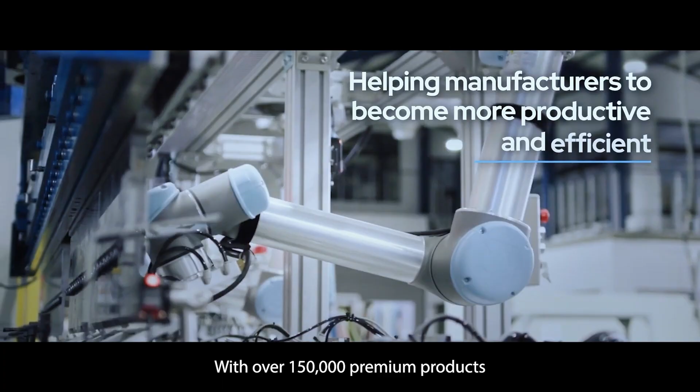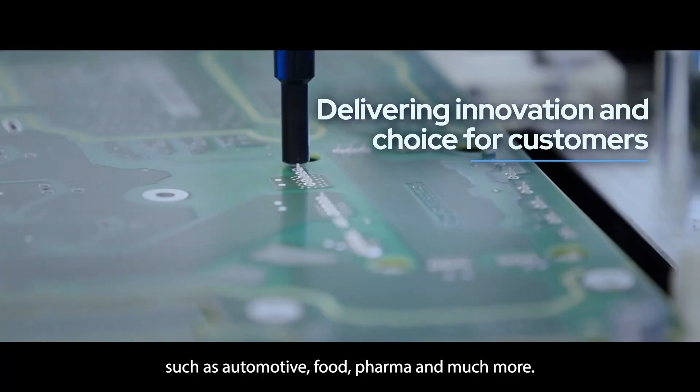Hello, I'm Yoav Katznelson, the CEO of TechCon Group. Hi, I'm András Kövesi, Head of Robotics in TechCon Group. With over 30 years of experience, TechCon has become one of the significant suppliers in the industrial automation market. With over 150,000 premium products and a team of over 150 specialist engineers, we support thousands of customers in different types of industries such as automotive, food, pharma, and much more.

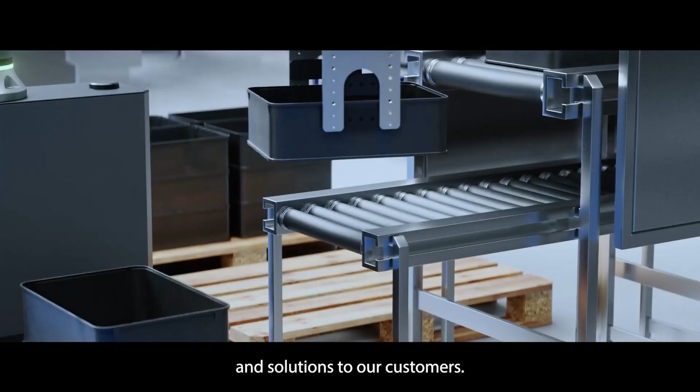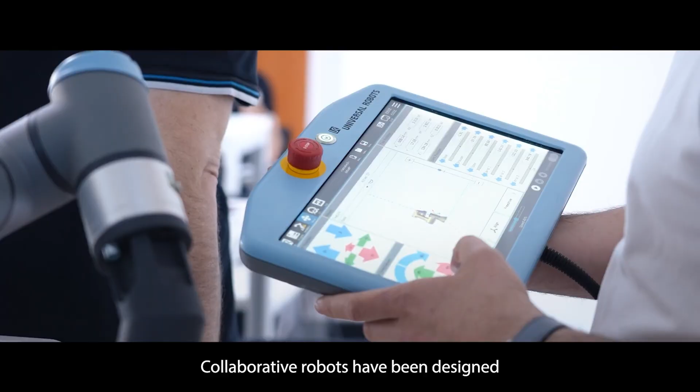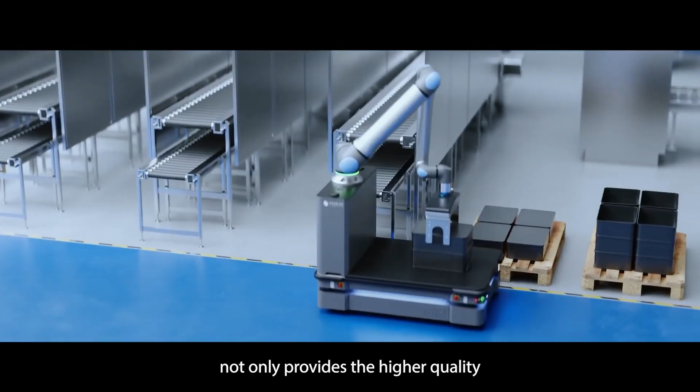It is in our DNA to continuously track the trends of the industry and deliver innovative production solutions to our customers. Industrial robots have been creating significant added value in the industry in the last decades, and in recent years we've seen the same trends with collaborative robotics. Collaborative robots have been designed and manufactured to work alongside human operators by taking over repetitive and ergonomically challenging tasks. Collaborative robots not only provide higher quality and increased productivity, but also increase the quality of the working environment at our customers' sites. In recent years, we have become one of the most significant distributors of Universal Robots in the Central and East Europe market.

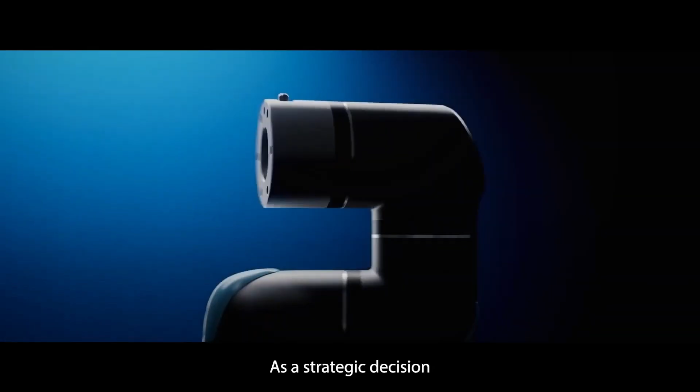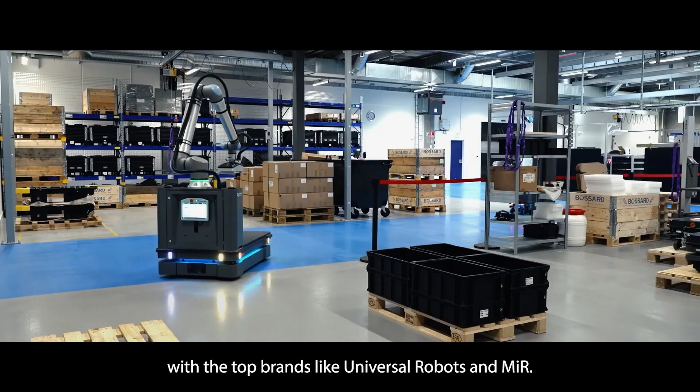As a strategic decision, it is an engine for growth for us, and mostly to support our customers, we decided to collaborate with top brands like Universal Robot and MiR. Our team possesses superior technical knowledge and experience in delivering collaborative robots and applications to the industry.

Our companies are equipped with cutting-edge technology workshops and high-level laboratories to design, manufacture and deploy the best collaborative applications to our customers. Our application engineers are trained and dedicated to find the right solution for any collaborative application demands from any kind of industry. But we don't stop at robots. Whether you are an end user or an integrator, we deliver a full package of automation for you. We encourage you to put your trust in TechCon, and we will help you realize your potential in collaborative robotics.

I would like to summarize the topics I will speak about here right now. I'm not going to go into a very technical discussion about AI usage in robotics. I leave this field for my colleague Wojciech, who is much more experienced in this. I would like to give some insights and key factors for industrial decision makers about investing in cobotics, like an executive briefing. I will also share some use cases, and this one will lead you into the AI field. You will see it at the end. This is all for me, and now I will start. Thank you.

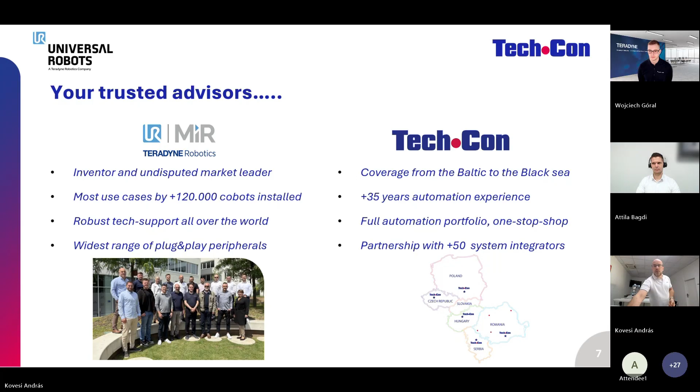Why is it not okay? It's changing now. I don't want to introduce you to collaborative robots because they exist since 2008 and they are widely known in the industry. But still, during our experience with our partners and customers, we face a lot of white spots and misunderstanding about collaborative robots. The first thing which is reflected to us very often is how come the cobots are not cheaper than industrial robots, because they are smaller and slower, so they appear like a small cheap industrial robot. But this is not the case.

Cobots are also industrial robots, but built with a lot more complex internal structure to enable collaborativity to work alongside human beings. As you see, a collaborative robot has a light alloy aluminum body. It has got torque controlled harmonic drives in the joints. It has embedded safety and control drivers in the software of the cobot. It has a lot of plug-and-play peripheral drivers also embedded in the cobot driver. All these are not default characteristics of a traditional industrial robot. Therefore, these functions have a certain consequence on the cost of collaborative robots, and this creates the fact that the collaborative robot's price is similar to an industrial robot's price. By the way, both are around the price of a medium-sized family car, like you see on the picture.

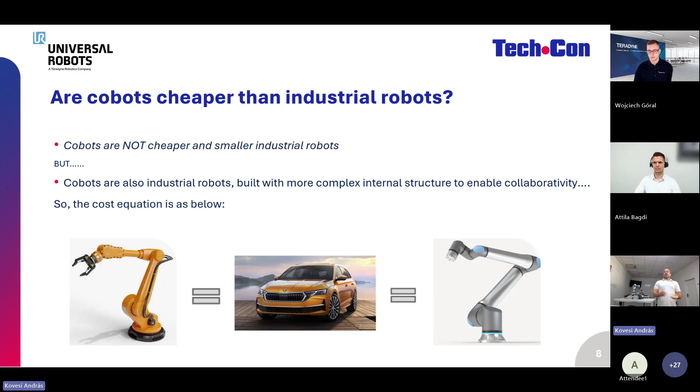So then comes the question: if they are not cheaper, then why apply collaborative robots? If we stay at the purely financial point of view, you have to know that the total cost of ownership of a full robotic cell is much lower than a traditional industrial robotic cell. Approximately, the difference is 40% in advance of the collaborative robotic cells in cost because of several factors.

First, the less complex construction and structure. The already existing and built-in control, safety, and driver functions in the software of the robot. The very easy and quick installation of plug-and-play peripherals. The lower, approximately 40% lower space requirement due to the more compact construction, and also due to the less safety space requirement. And at last but not least, the installation due to all this is approximately 2 times faster than the robotic cell. So all this provides a high cost advantage to the collaborative robotic cells.

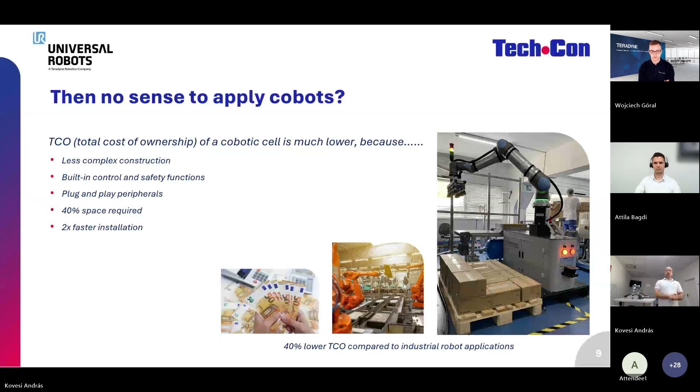Then, is it only about the investment cost? Of course not. When a production plant is intending to invest into automation, there are a lot of other factors to be considered. I highly recommend to you and your teams to put these 5 questions for yourself and examine them carefully before deciding which kind of robot to install on your shop floor.

The first one: what is the mix of your production? If you have a lot of frequent changeovers with high mix, medium to low volumes, then it calls for collaborative robotics, because the changeover times due to the flexibility and the plug-and-play functions are much faster. You can even change the location of the cobot much easier than an industrial robotic cell. Of course, if you have high volumes, low mix, then it calls for industrial robots. Also very important to know if you have in-house robot programming skills or not, because industrial robots require high-level in-house programming skills to run smoothly, while collaborative robots are a lot more autonomous and basic programming skills can be learned much faster. The second one is, of course, the throughput, what the target per minute is.

Speed is the primary bottleneck. Collaborative robots are usually useful during a retrofit automation of a production line, where you replace an existing human-operated workstation with an automated one. On speed and throughput, these cobots can work safely, but if you need lower cycle times, below 5-6 seconds per cycle, you must go for industrial robots.

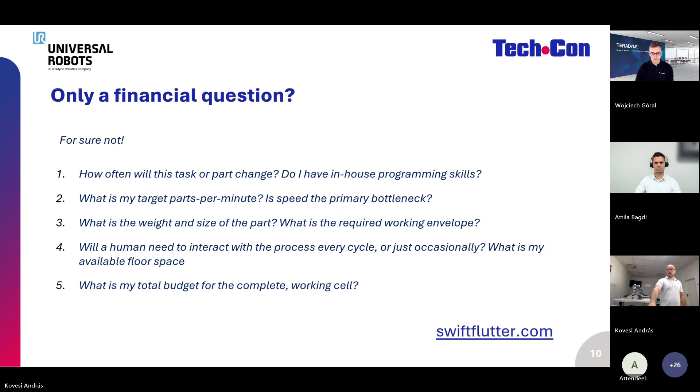And last but not least, the budget for the complete working cell - we've already discussed this on the previous slide, so I don't want to repeat it.

Let's say in this aspect you have decided to invest into collaborative robotics and build cobotic applications. Here are a few rules of thumb to help you find the right task for a collaborative robotic application. The first one, quite understandable: collaborative robots can perform more or less the same simple tasks done by human operators.

By speed and weight, they are more or less on the same ability as a human operator. They're a bit faster, because the tool center point speed of a cobot can be up to 4 meters per second, and they can lift even 30-35 kilos. And of course, they don't get tired - they work 24/7, 365 days a year. As a general approach, what can be done by a human operator, a cobot can do.

The next point is very important: always look for the 3D test. 3D here isn't the dimension - it's a synonym for dumb, dirty, and dangerous tasks carried out by human operators. If you relieve your skilled workforce from unhealthy, unergonomic, boring tasks, you can use their high skills for more complex tasks, improving your production efficiency.

The third point is also very important. We face quite often the request to automate the most complex and difficult non-automated bottleneck of the production, and this is tricky - usually there's a reason why a certain task isn't automated. So I always advise automation teams and decision makers to go for low-hanging fruits first, automate tasks that can be easily automated, and then dedicate the skilled labor you liberate from those functions to work on the bottleneck, non-automated stations of the production, which will help you overcome that bottleneck.

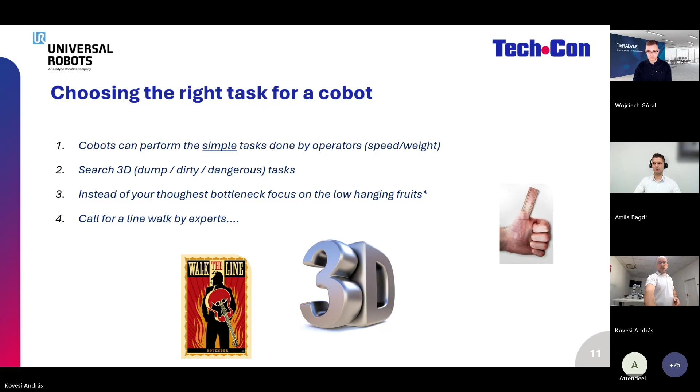And at the end, I'd like to show some non-typical use cases, all from our reference list, performed by us and our integrator partners, which can give you some nice aspects of possible collaborative automation options from a non-standard point of view. The first one - I'll start the video now.

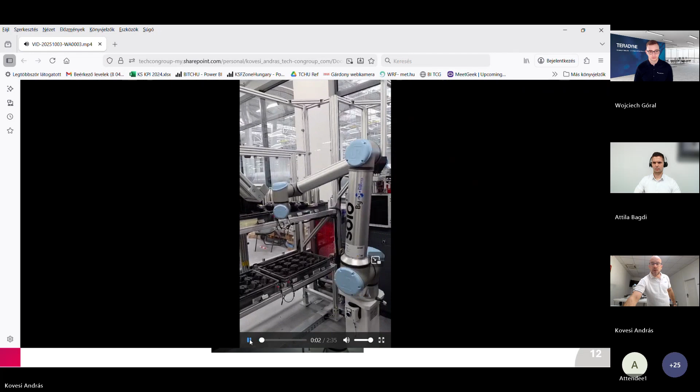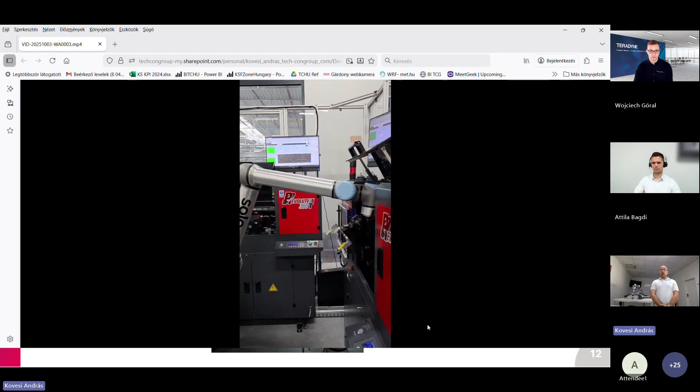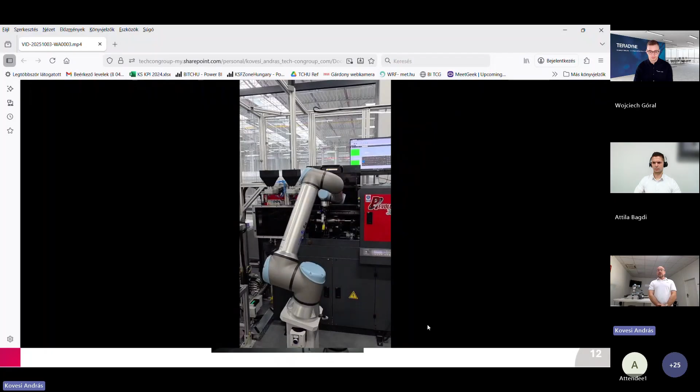Okay, so the first one is a machine tending task. What is especially machine tending? Not specifically the machine tending, but as you see, the workpiece and also the machines, these workpieces are bottles, and they are being tampo printed. This application is at a company producing gifts and promotion materials for enterprises. This collaborative robot is tending CNC-driven tampo printing machines.

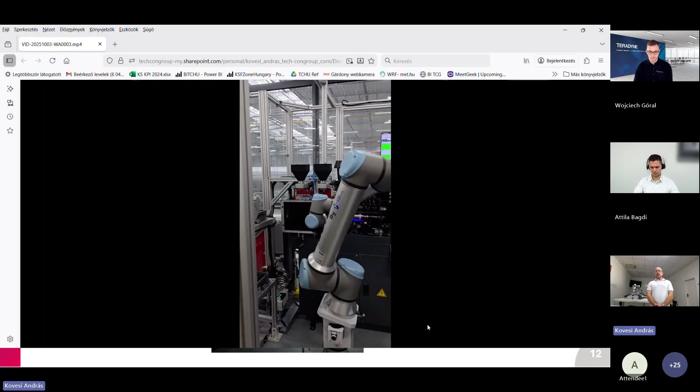This is a special success case for us because by implementing the robot, the throughput has increased by 40% in the production line. After installing the first cobot last autumn, another 3 is just being installed right now, and the next 3 is going to be released in the beginning of Q2.

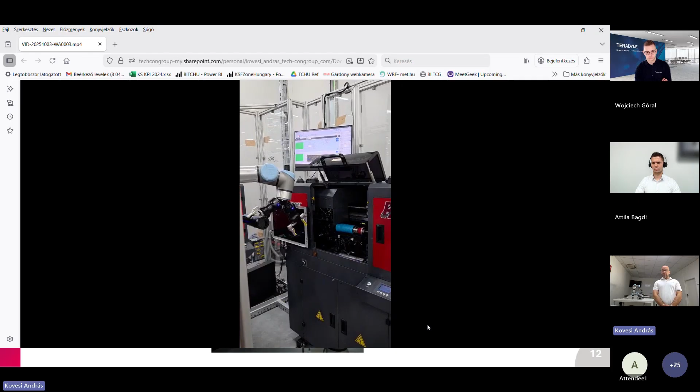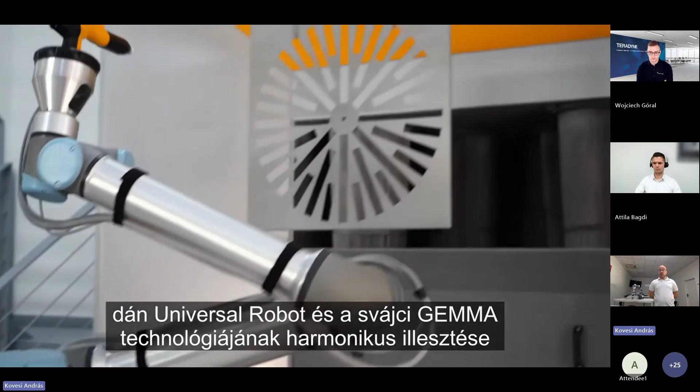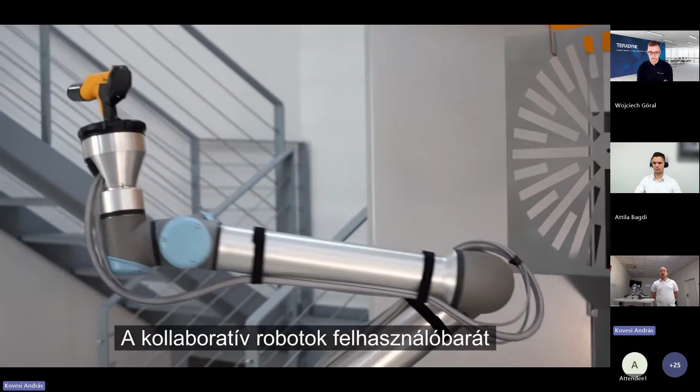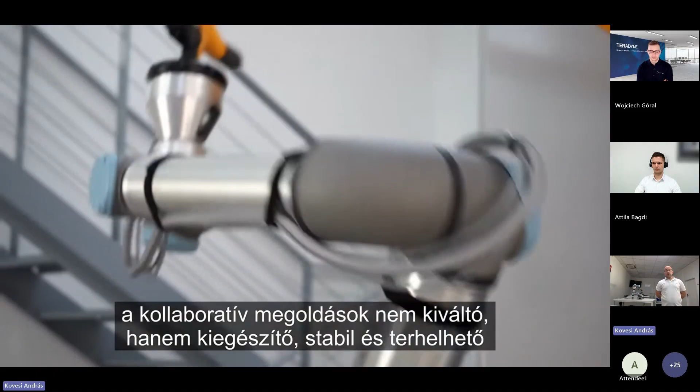The second application is a powder coating application. Yet again, automatic or robotic powder coating lines have existed for decades now. What is special here is that together with Gema, the powder coating systems producer, we have developed a collaborative robotic station to do the job on the manual stations. That means this application is specially designed for high mix, low to medium batches from 100 to 5,000 pieces in one go.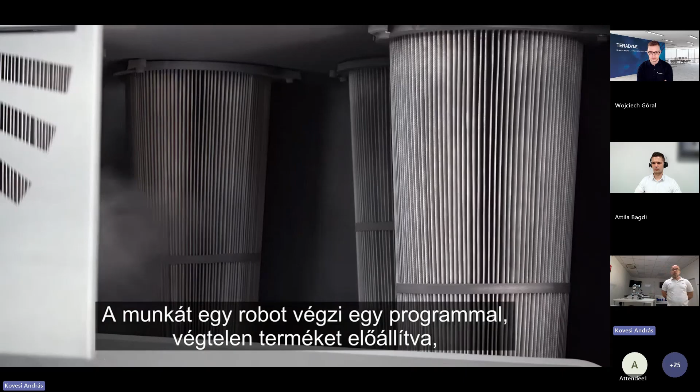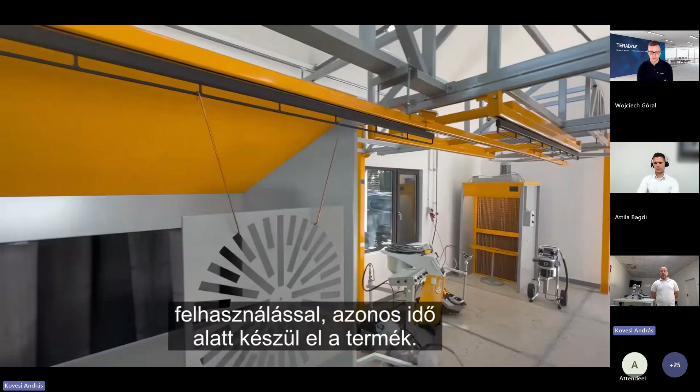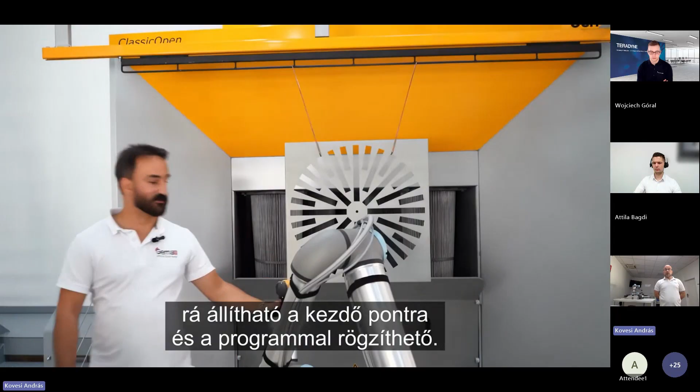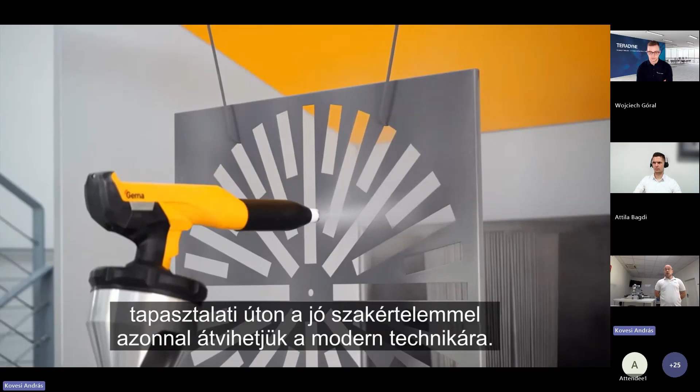With the very easy programming of the collaborative robot and the plug and play Gema powder coating pistol, the reprogramming of the cobot for a new workpiece to be painted takes between 10 to 30 minutes. So it enables an enormously quick changeover time. And yet again, powder coating is an unhealthy, unergonomic task, which is difficult to find good human operators to do. This gives a very good solution to relieve them from these unhealthy and boring tasks.

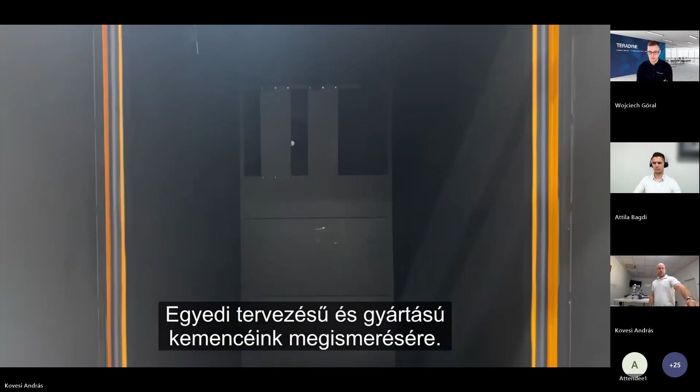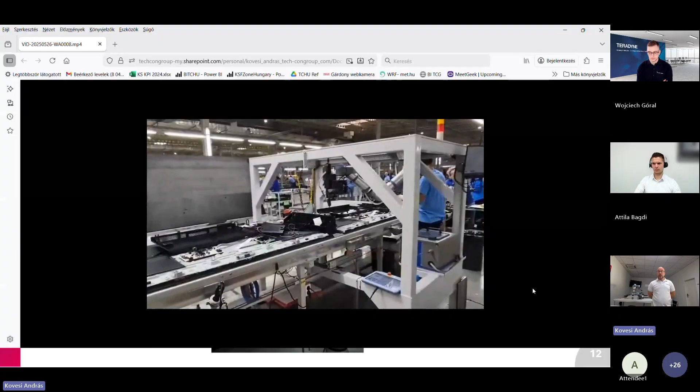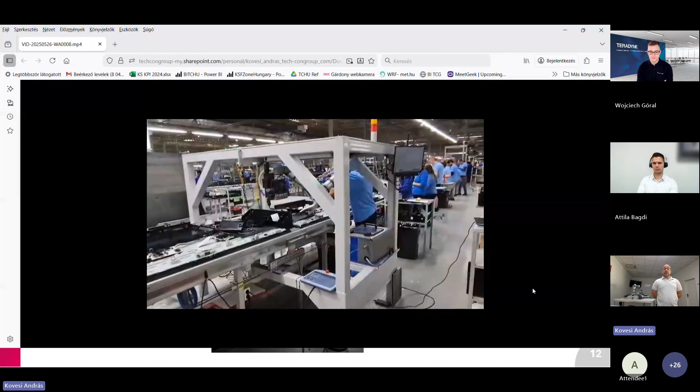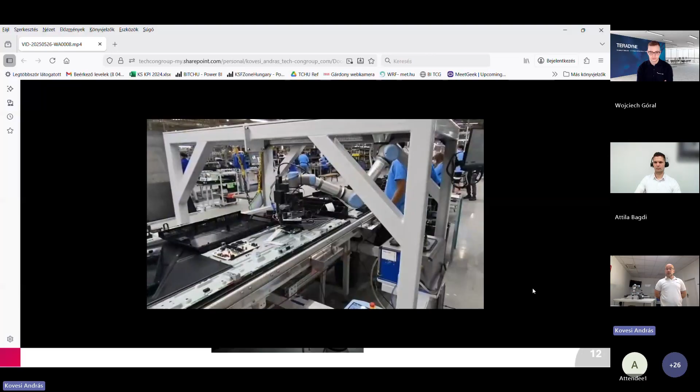At last but not least, this is a screw driving application, yet again, not so special. What is happening here? A collaborative robot is screwing the back panel of the LCD TVs on the frame. What is special here is that, as you see, the conveyor line is moving; it's not stopping during the screw driving operation, and also the TVs or LCD panels on the conveyor line are not positioned, so they can be inclined compared to each other, or they can follow each other at an uneven distance. So we need to implement machine vision to identify the nuts to screw and perform the job on the go as the conveyor line is moving.

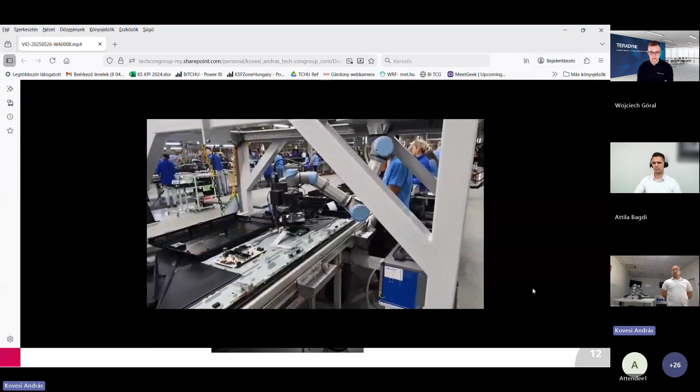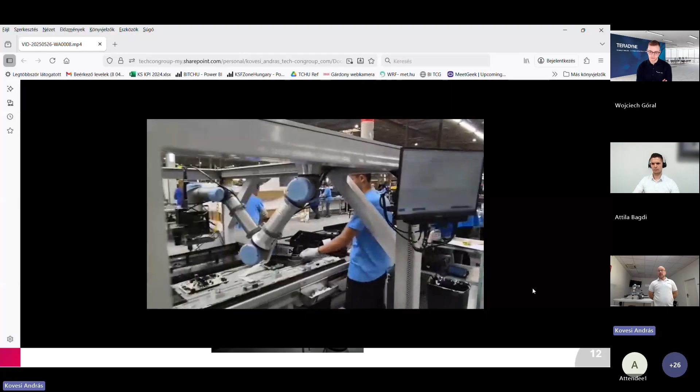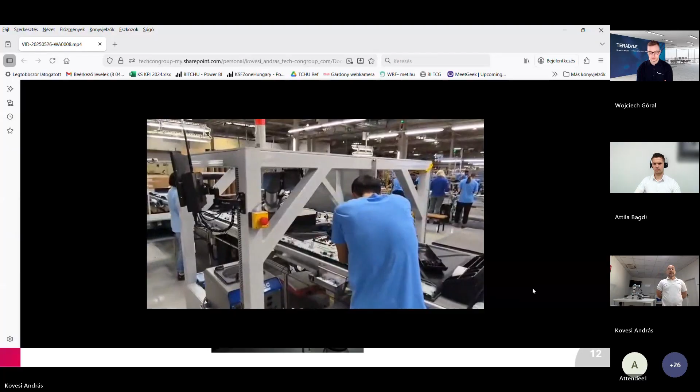We carried this out with a very experienced integrator partner, even though, because we were doing it at that time without using AI-based vision, it took us pretty long, a lot of energy to ramp up the efficiency of the station to work really properly. It was approximately 6.5 months to really get to the results and the expected first pass yield that was intended at the scope. This is definitely a very good point for AI-based applications, like AI-based screw driving.

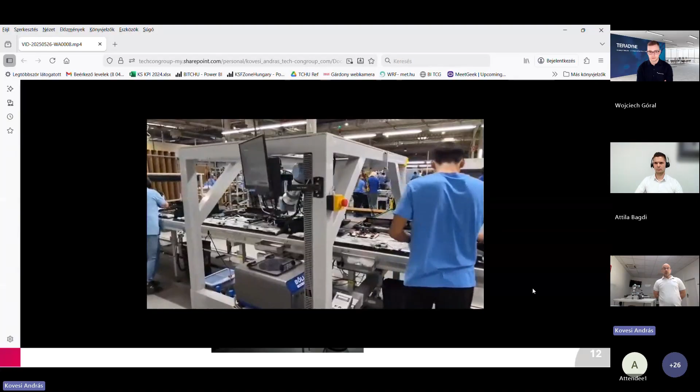Because the AI learns much faster than traditional programming of machine vision, the ramp up is much faster. Also, because AI improves its efficiency continuously, the final quality, or let's say first pass yield ratio of the application, will be better than traditional ones. So this is typically a good application for AI in the industry.

While much of this is still emerging, the direction is clear, and that's why AI is a key focus area for us, for Teradyne Robotics. We invest in AI because it's fundamentally changed how quickly robots can be deployed, what tasks they can handle, and how scalable automation becomes. So AI allows our customers to automate more applications faster and with far less complexity.

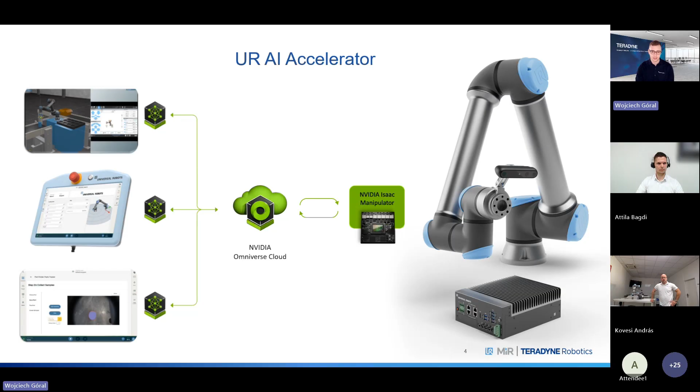Moving forward, this slide will be about the shift from just AI demos to an AI platform that scales. And this AI platform is the main topic of this presentation from my side.

So with Polyscope X as the foundation of the AI Accelerator, we are building a platform that is developer-ready by design. For developers and third-party companies, the key value is the structure, because we have a ready environment, reusable resources, and pre-built integration paths. They don't have to solve the hard plumbing every time.

The platform already provides the communication layer between advanced NVIDIA-class algorithms, all the libraries, and UR robots. So partners can focus just on creating real applications and solutions. This is how we enable an AI ecosystem, where solutions like visual inspection, for example, and vision-guided robotics can be developed without creating everything from scratch.

So packaged and deployed much faster, and the biggest benefit is for the end customer, because an AI application can run directly within PolyscopeX. So operators can use AI on UR robots without being developers. It becomes an application experience, not an R&D project.

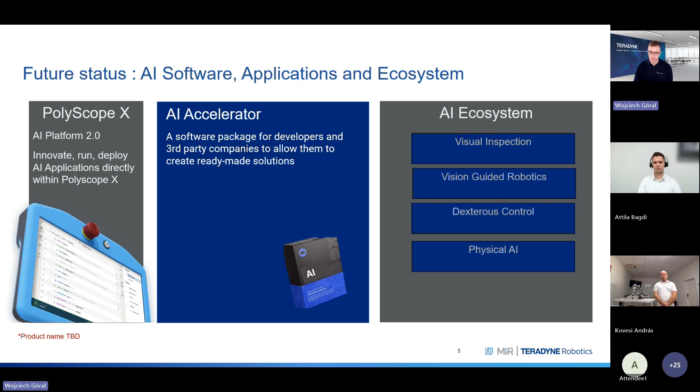And for those of you who are already familiar with our robots, this slide will tell you a little bit more about how AI is as easy to use as universal robots themselves. One of the biggest barriers to adopting AI in automation today is complexity, because you need to be an AI expert, data scientist, and custom development engineer. With the UR AI platform, we are changing that.

Our goal is very clear: AI applications should be as simple to use as programming a UR robot. As I told before, if you're already familiar with our robots, you know that programming and using external software like URCaps is pretty simple to use. So we try to build the same for AI platforms.

The platform is designed so that the complexity of AI is handled upfront by developers and partners on the previous layer, and exposed to the end user through a clean graphical user interface, as you already know from the UR perspective. Instead of writing code or understanding AI models, users interact with ready-to-use AI applications directly from PolyscopeX. Configuration happens through familiar screens, buttons, and parameters—it's more like parameterization instead of clear programming.

This move dramatically lowers the level of knowledge required to develop and deploy AI-based solutions. Customers don't need to be AI developers anymore to benefit from AI in a short time. So to sum up everything, the UR AI platform brings AI to the shop floor in the same way UR robots brought robotics to the shop floor.

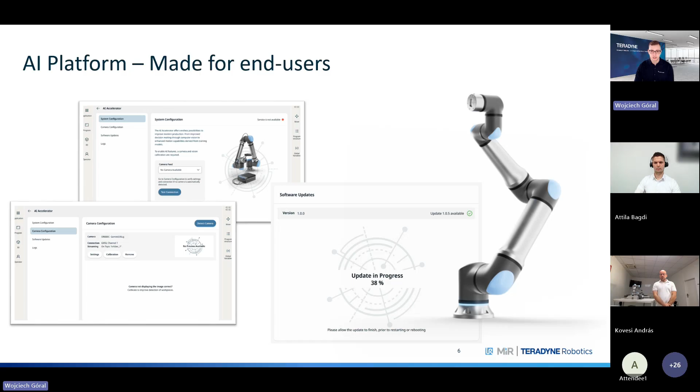Our key message is simple: AI should not be complex or reserved for experts like high-level developers. Just like Universal Robots made robotics accessible, our AI platform is designed to make AI application easy to deploy, operate, and scale. We will prepare everything for you with our third-party companies, and then you, as an end customer, if you would like to create an application, for example, for AI-based bin picking, you will just use the screens and the buttons directly on our teach pendant, and everything will be done in the background as a ready-prepared solution.

Literally, the answer is very simple: everything, more or less. If you take a cobotic application, we can provide the 7th axis, the robotic cell frame and fencing, conveyor systems, lift and actuator systems, and of course the gripping, which is, I think, the most important part. We've been working with Piab vacuum automation for more than 30 years now, and we are really champions of gripping and handling, which is always the most critical part of any automation task. So literally, we have everything around the robot from one hand that you need to build a robotic cell, a cobotic cell.